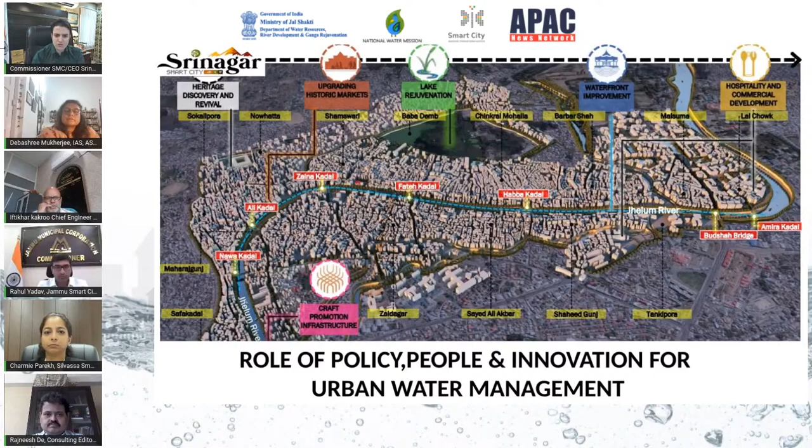So this is the Jhelum Basin. This is the Jhelum River, which meanders through the city, and these are the kind of interventions we have actually tried to identify, some of the major water bodies which are getting linked with the river. This portion, which is very prominent, passes through the central business district from Lal Chowk to Batmaloo to other places, and then goes towards the old city. So this is the topography that we were already talking about.

Now these are the projects we were talking about. One is the Jhelum riverfront development, in which we are trying to, number one, beautify the river on both sides. We have taken it in two stretches, covering almost most of the city. Some portion is greenfield, the rest is brownfield.

We are creating spaces for people where they can come, sit together, and socialize. Some places where they can shop, sit, walk, or cycle. Similarly, all across the river we have around 45 traditional ghats. We're trying to revive those river ghats, and also trying to use some of these ghats for water transportation purposes. Then we have lake conservation.

We have taken two important lakes: Gilsar and Khushalsar. Basically, the water from Dal Lake goes to one more lake called Nigeen. Nigeen is still well conserved. From Nigeen, it goes through a channel called Nala Amir Khan, then to Gilsar and Khushalsar. Both these lakes were almost dead, full of muck and silt. So in order to ensure the circulation system of the water is revived, we have taken up restoration of both lakes.

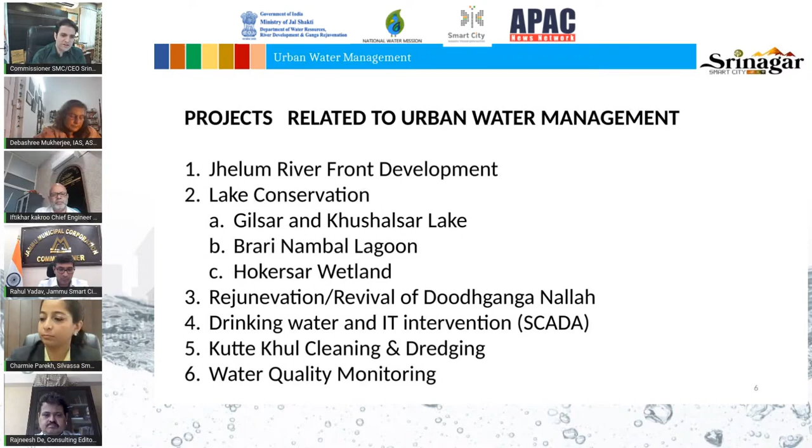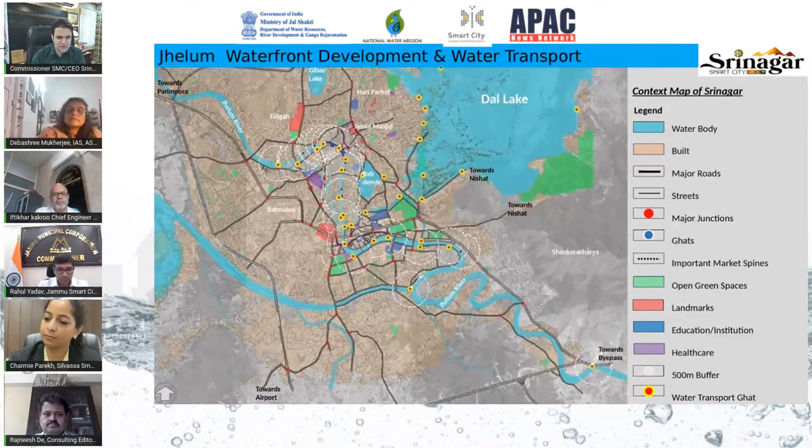I'll quickly go through the slides. These are some pictures of the riverfront development that is going on. Some of this work is already complete, but the remaining is going on. This is what we are envisaging on the riverfront: access improvement, public amenities, ghat improvement, and improvement of the houseboats lying nearby.

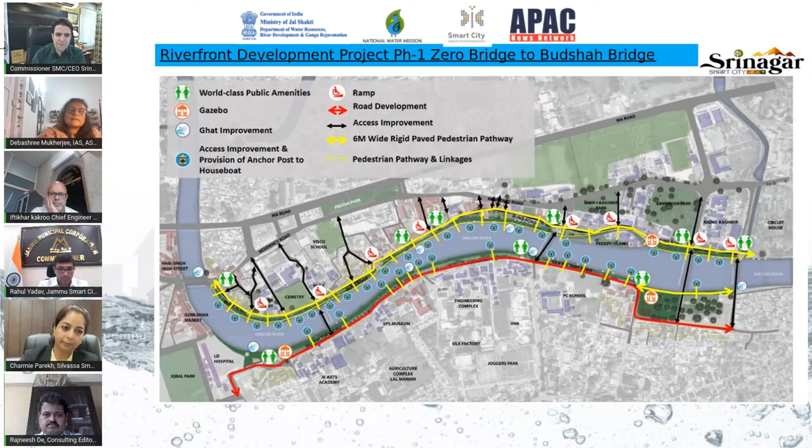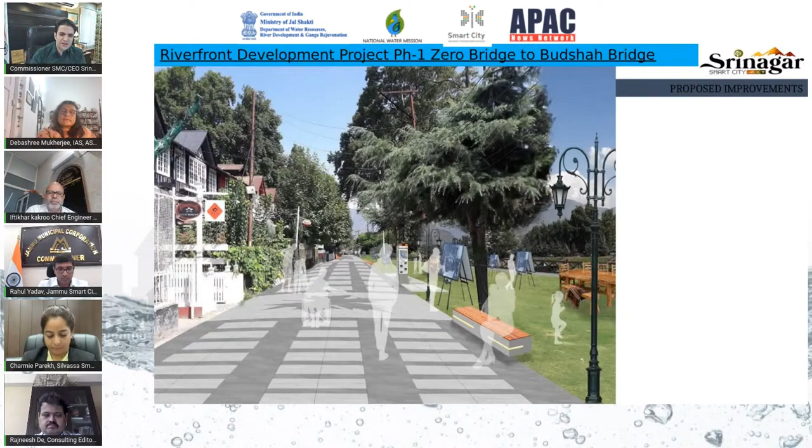These are the approaches towards the riverfront from Residency Road and other sides. This is how we want the riverfront to look like: a nice, good pathway for people to walk, and the space around it, which is very open and accessible. We have dismantled a lot of walls on this. Right now, the dismantling has happened, and we're trying to restore it in this way.

Then water transport. As I was talking about, the city is facing one of the major challenges in terms of congestion and traffic jams. But both Jhelum and Dal Lake give us the opportunity to run water transport, just like it is run in, say, Netherlands, Amsterdam, or London. That's what we are working on.

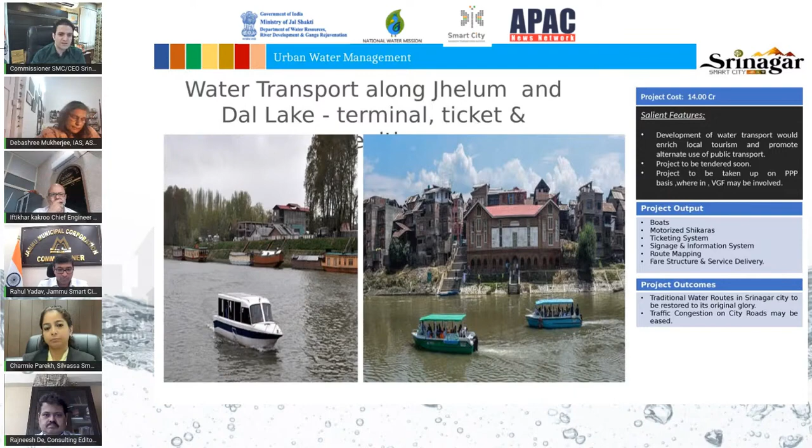One is a Jhelum cruise for tourism purposes. Another is the water transport, for which we are working on a PPP model for 10 years, in which we'll be having electric-powered cruise ships taking people from one part of the city to others as a full-fledged system of water transportation.

Lake restoration. This is the Gilsar Lake that I was talking to you about. The lake ecosystem here is such that water from Dal Lake goes into Nigin Lake, and from Nigin Lake it goes into Gilsar Lake.

This is how this lake was just 6 months back, the picture on the left side. We have lifted all this muck and garbage and silt and weeds out of this lake, and this is how it is looking right now.

Again, the challenge is that it has to be done repeatedly because the siltation is happening. There is still heavy nutrient load in the water which is getting into these lakes. So we're trying to figure out how do we sustain it, how do we stay ahead with the rate of sedimentation. This is another lake that we're talking about, Khushalsar Lake.

This is how it was before the restoration and now how it is. In the past few months, we've also seen in the winter some of the migratory birds coming back into these two places. So what we have essentially done is, number one, removed all the silt and muck from these lakes.

Then there were a number of springs at different places in these lakes, which are a major source of fresh water in addition to the regular flow. The restoration of those springs, and also channel development around the periphery, so that the water movement and circulation keeps going. This is another lake that we have now taken up for rejuvenation.

It is in the middle of the old city. We call this old city Shahri Khas. This is the old city of Srinagar city. In the middle of the city, we have this lagoon. It's called Brari Nambal.

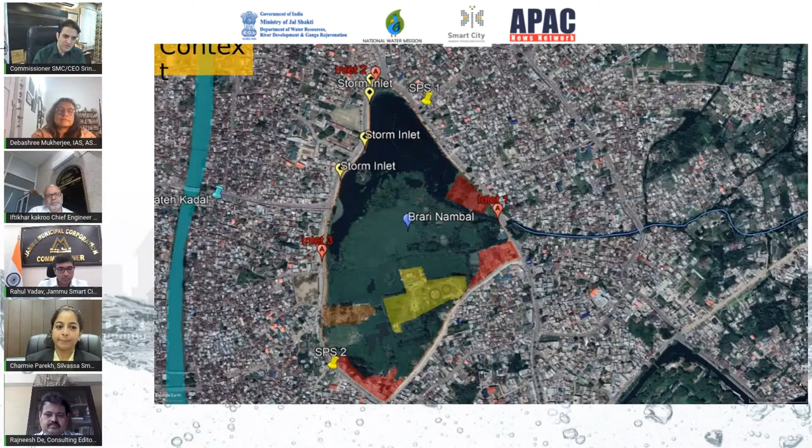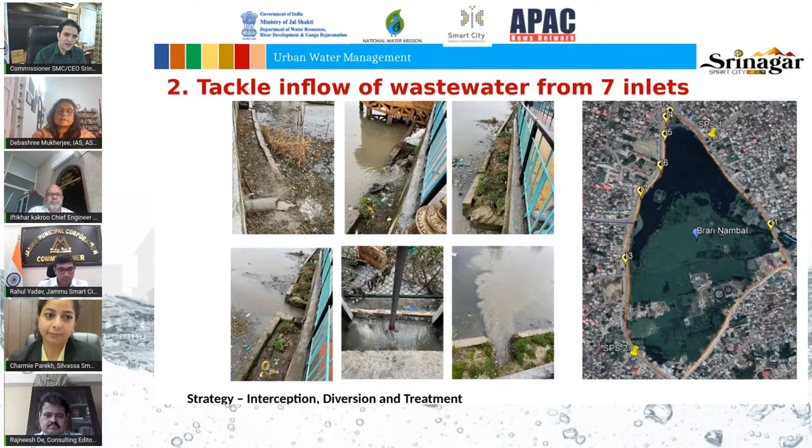Again, along with that, these are the 7 inlets that we are trying to work on. Desilting, deweeding, these are some of the inlets as of now and how we are trying to work on them. These are 7 major inlets from which water goes. We're trying to trap this water, connect it to the sewerage system, and then whatever is the major source of water comes only after it is treated.

These are some of the pictures from this place. This is some of the treatment system, very standard. Here, what we are also trying to do, along with the mechanical and STP based treatment of the water, is look at creating sedimentation ponds and bioremediation as an additional source of treatment of this water. So that's the work that we have started.

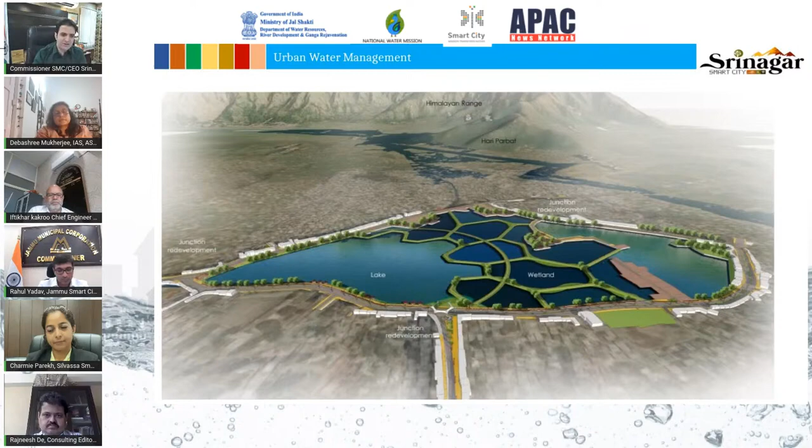We had actually tendered this project already out. Because of certain reasons we have to re-tender and redo it, so it is at that stage right now.

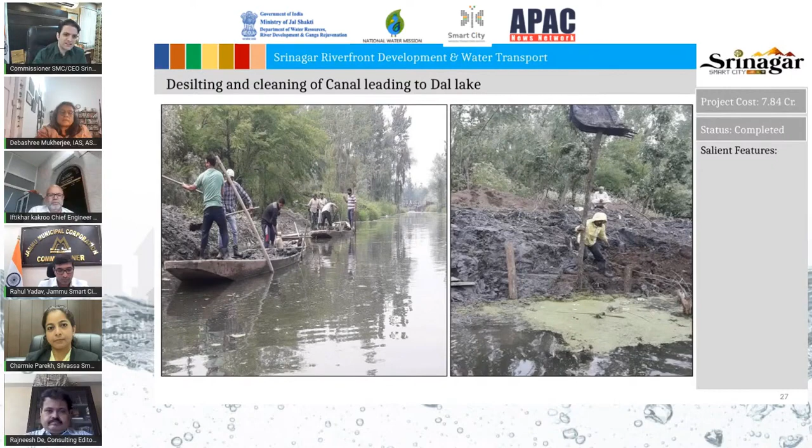These are some of the channels which go into the lake. Through both municipal corporation as well as the smart city, we are opening these channels up again, removing the silt, so that the circulation system gets restored.

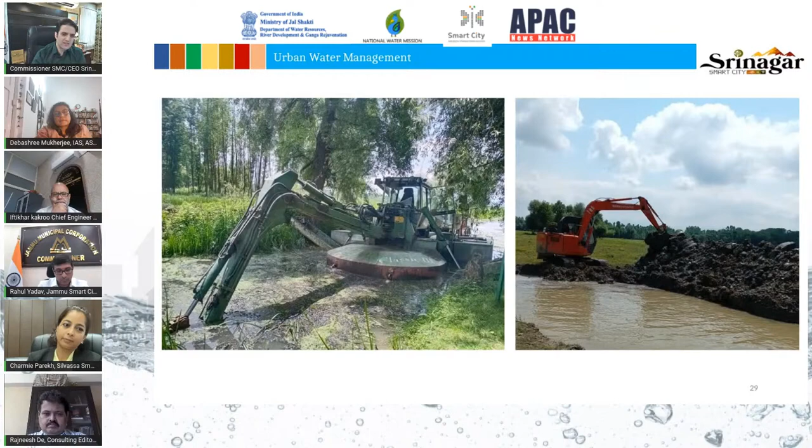This is Hokersar wetland, a very famous one. In 2005, it was included as one of the Ramsar sites. It has around 46 important species of migratory flying birds, and another 60 odd wetland species of birds. Here also, in this restoration work, we are creating certain channels through this wetland so that the water systems are again restored.

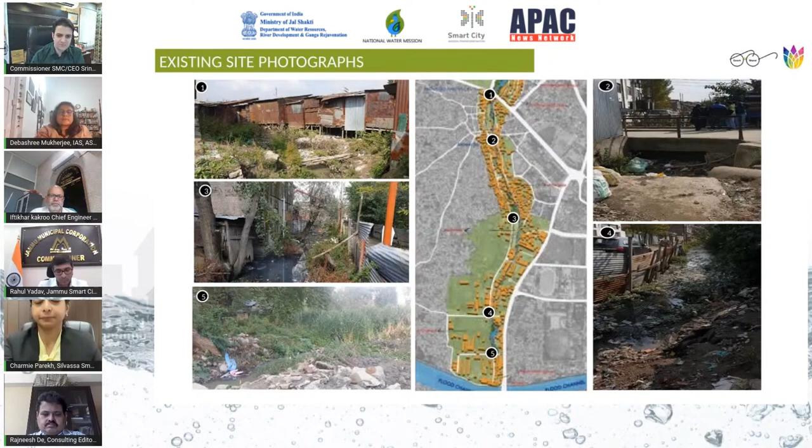This is another channel, the Dudhganga Nala, which I was talking about. It used to be the major flood channel in the city, connecting the southern part of the city and draining this water into the river Jhelum. It is completely encroached now. This is the situation of this stream right now, and it has just gotten converted into, so as to say, a sewerage stream.

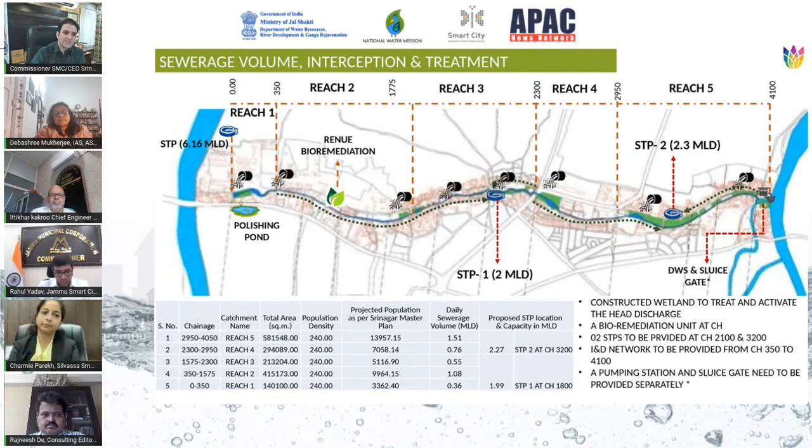So we have worked out a system of how to start bioremediation, how to create polishing ponds, STPs and other sluice gates throughout the structure. Once this is complete, it's going to be a dual two-way win for us. One, whenever there are rains, this is going to be a major channel for taking water out from the city. And in normal days, it will help ensure that whatever grey water is coming in gets treated, and only after treatment it goes out.

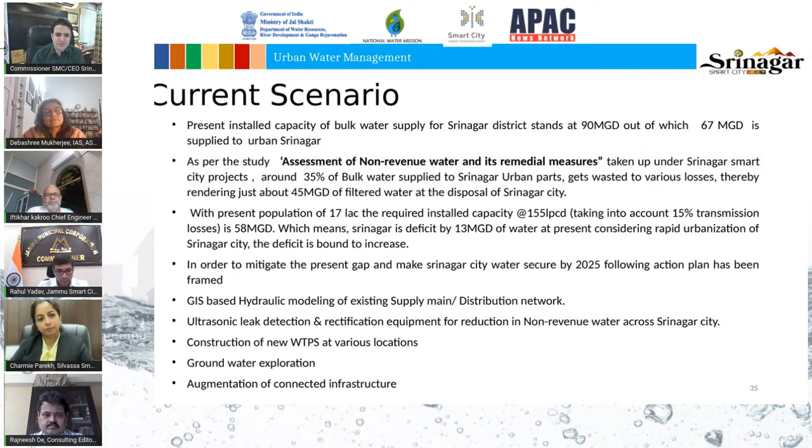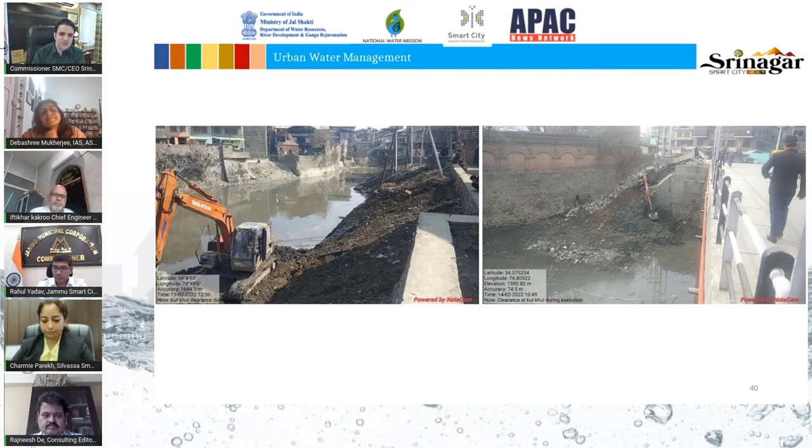This is another channel called Kutkol. There are actually 4 of these kols, kol meaning stream in Kashmir. So apart from the Jhelum and Dal system, these are 4 different channels which connect these water bodies. One is Nale Amir Khan, we already started working on this. This is another called Kutkol, the Kut stream, and we are also restoring this stream back.

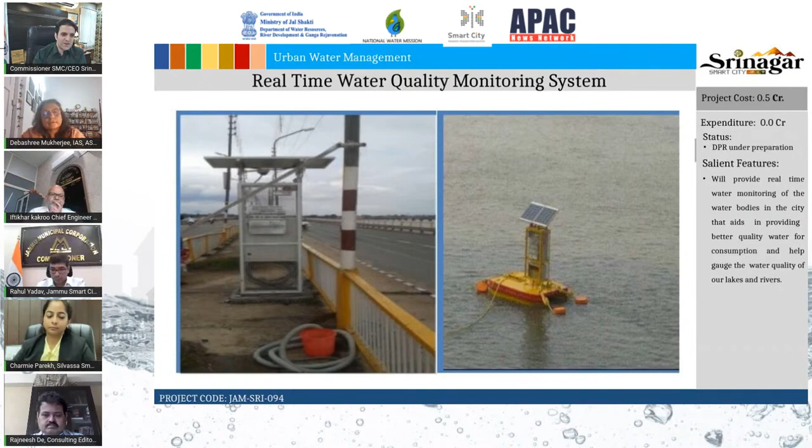This is the final slide. We are also installing a real-time water quality monitoring system in the city, which will monitor the quality of water both in River Jhelum as well as in the Dal Lake and some other major water bodies. The idea is to measure and understand what the quality is, because as they say, what gets measured gets done. That's the principle we are trying to work with.

This stormwater drainage, as I was talking about, because the city traditionally had seen floods recurringly, 2014 being one such occurrence. So in stormwater drainage, we have done macro drainage basin management in the city. The city has been converted into 9 watersheds and 53 macro drainage basins, and we have 84 dewatering stations located, connected to the drainage network in the area. There are submersible pumps inside the sumps, water from the drains gets delivered into those sumps, then there are filter chambers and sluice chambers, and from there this water gets pumped out through an outfall into the major water channel, either a flood channel or the Jhelum River, whichever is nearby.

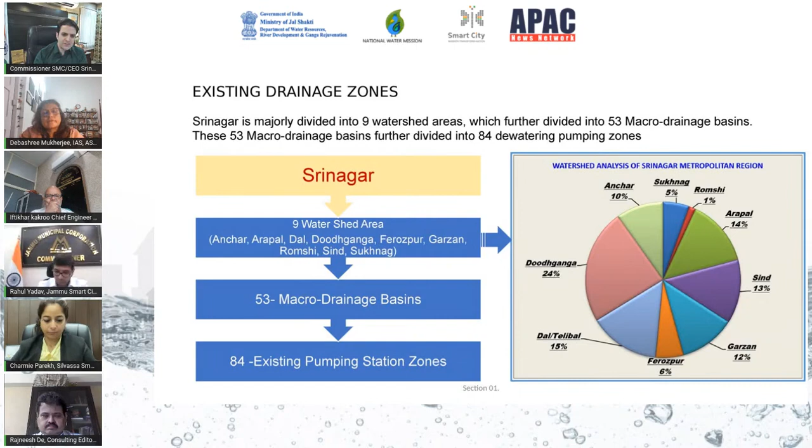This is the existing challenge. Many times this is what happens whenever there's a small rain or post snow, when the snow starts to melt. So with this, we have increased the capacity of these 84 dewatering stations by at least 10 times till now. All state-of-the-art modern equipment has been installed. All power backup systems, control systems, and where people sit to control, have been placed above the highest flood level, and redone. Besides that, under JTFRP, Amrut, and several other programs, we have also upgraded our drainage network system. Yet challenges remain.

Before I conclude, one of the challenges is water quality. We are improvising on the circulation, but how do we get the BOD levels and other parameters down to the permissible ones, both in the rivers and in the lakes? That's one of the challenges.

Another challenge is that the city does not have a separate drainage and sewerage network, so everything is getting mixed up into the drain. That's one of the major infrastructure challenges we have, and going forward that will be a major priority for the government. We are trying to lay down a master plan or pathway for planned development.

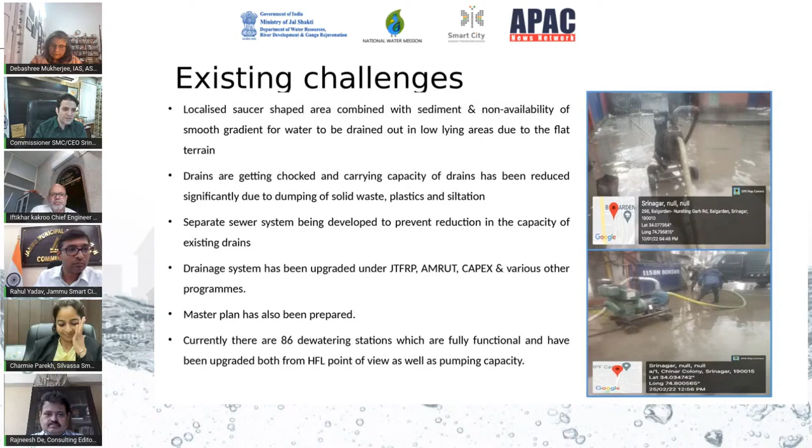Thank you. I think Iftikhar Sahab, if you have something to add. Sir, I think you have covered it all. If I say something, it will be at the cost of repetition.

The only thing I'd like to mention is that ma'am talked about the water energy nexus. In Kashmir, we have a lot of upland water, and I think our focus should be mainly on tapping the upland water rather than relying on lift stations and groundwater. We have vast reservoirs of groundwater, mostly untapped, because we do not find a deficiency in source. There are isolated pockets with deficiency, but these can be overcome if we identify bankable, dependable sources, and through a water conveying system, which is the cheapest version of water conveyance, through pipes, we can feed these areas.

Right now our focus should be on upland water, and since ma'am is also looking at the water mission, the government's focus should be to discourage use of lift stations for water supply schemes and rely more on gravity water or upland water. That's all I want to say, rest I think you have covered it all. Very nicely covered, thank you.

Ma'am, would you like to give your feedback now or at the end? No, I think I will wait. Excellent presentation, Athar, you focused on the challenges and what you're doing. I may have one or two things to say, but I'll wait till the end.

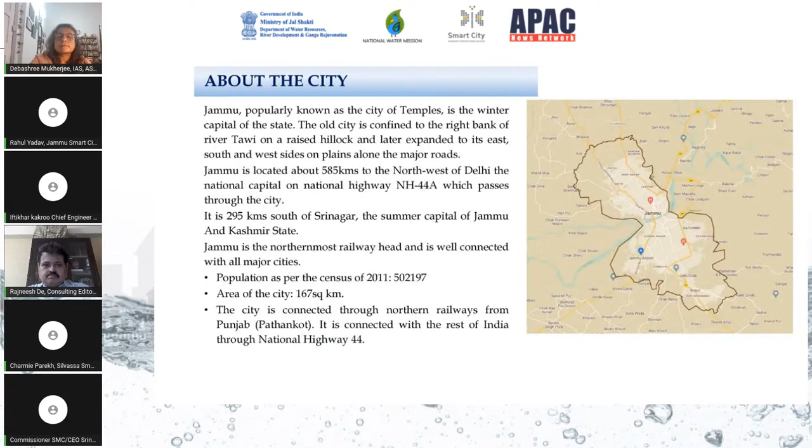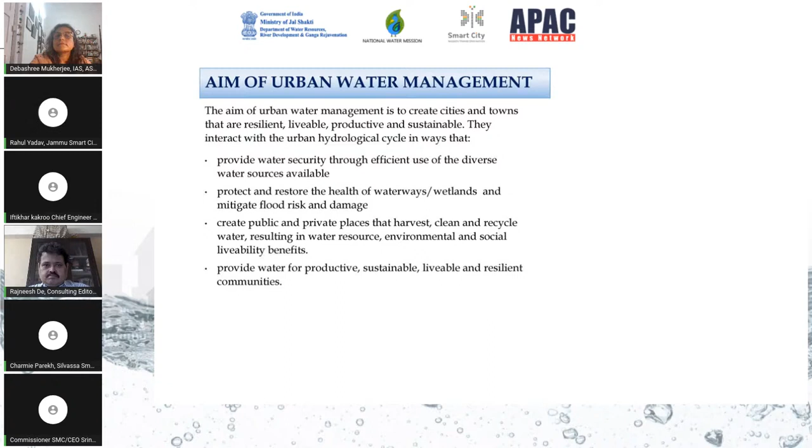We have started one project for rejuvenation of water bodies.

Under this, we have started the process to identify all the water bodies in Jammu Municipal Corporation area and rejuvenate all these water bodies. The broad objective was to rejuvenate the water bodies and improve all the parameters of these traditional water ponds we are having. We did a detailed survey of current biochemical oxygen demand, pH level, COD, and DO.

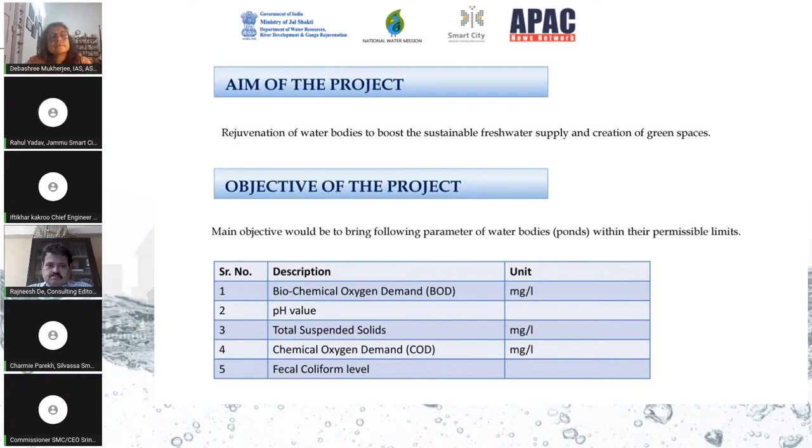We have prepared a detailed plan. We are de-weeding all these water bodies and doing desludging of all these ponds so that we can increase the holding capacity, and we are using traditional clay lining so that water can be retained throughout the year.

Bioremediation is the major part of our project. Most of these water bodies, over the period, have had many nalas flooding into them, decreasing the water quality and basically killing these water bodies. So we are also doing some civil works to tap all those nalas, installing screen chambers wherever necessary, and diverting many of these nalas which were falling into these water bodies.

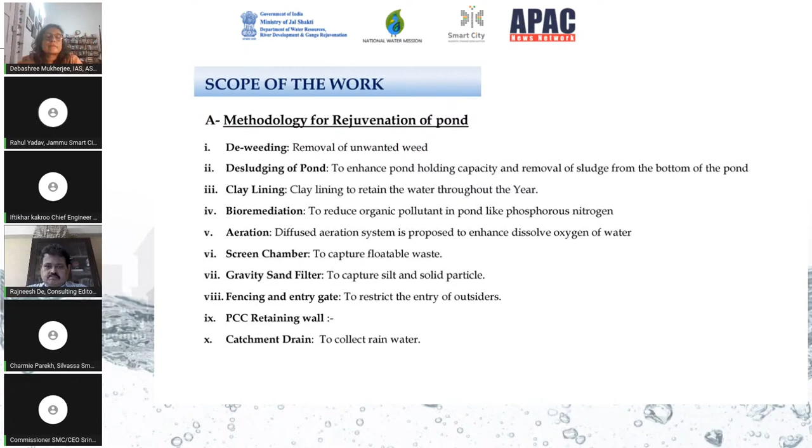Other than that, we are also constructing some civil amenities along these water bodies to give it an aesthetic look.

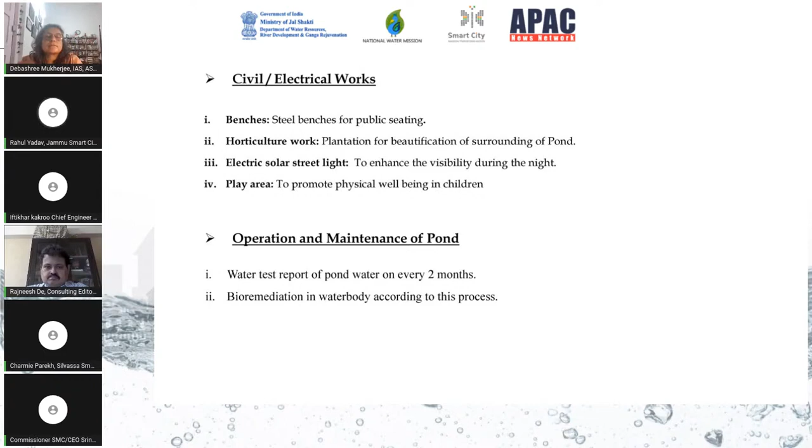Our project also involves O&M of these water bodies for the next 3 years. The same person will also be doing the O&M. Water quality will be monitored every 2 months, and based on that, we will be doing further remediation if anything is required.

Under this project, we have identified 61 water bodies in Jammu, with a total area of 368 kanal. The current total volume of these water bodies is 3,39,600, and it will be increased to 4,25,000. So there will be a sufficient increase in the water capacity of these water bodies.

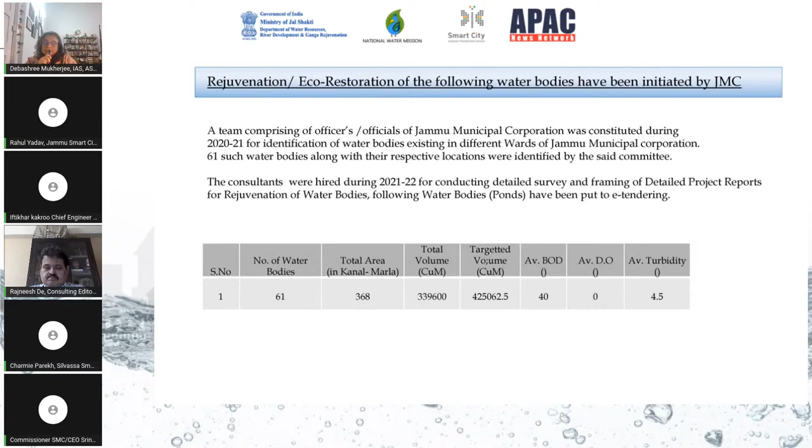The current BOD demand is quite high, and the available dissolved oxygen is almost nil in all these water bodies. We will be increasing those and improving the water on these parameters.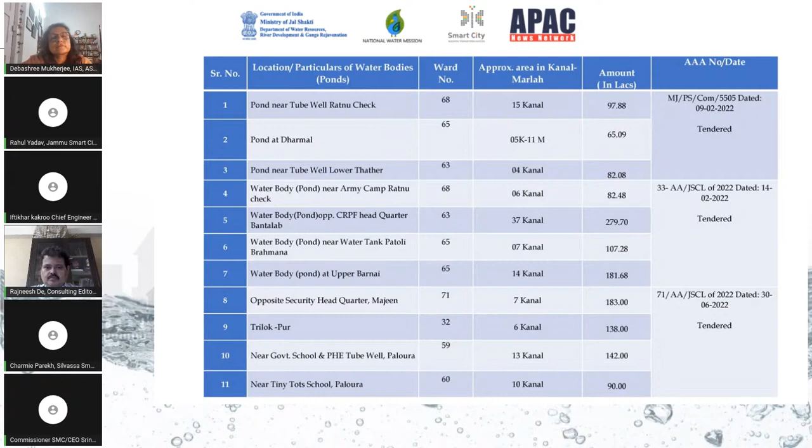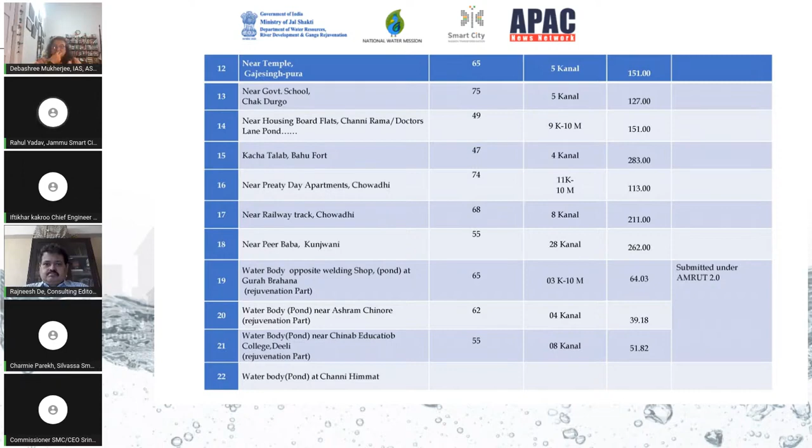In the first go, we are taking 22 water bodies. We have identified 62 water bodies, but in the first go we are taking 22. 18 of them we are taking under Smart City, 3 of them under Amrut 2, and 1 under our district capex.

These are the existing water bodies for which we are doing remediation, and as you can see, many of them are actually in very bad shape. They are mostly enclosed with high weed growth, and the water quality is very bad. There is hardly any biological life, meaning there are hardly any fishes or such kind of biological life available in these ponds these days.

These are more pictures of such ponds. This is one of the ongoing projects where we are doing the restoration work. Bioremediation work will be starting after our monsoon season is over. We have tendered all these works, and all these projects are under execution, but the main part, which is bioremediation, will take place after our monsoon period is over.

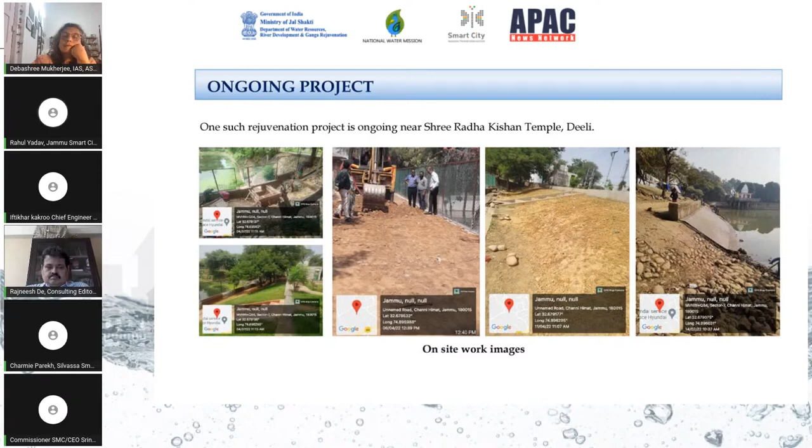We are also doing aeration of all these ponds to increase the dissolved oxygen quantity.

We will also be doing channeling and fencing of all these water bodies so that they remain safe. There is also a special emphasis on water channels, because many of our water bodies, due to unplanned development, have had their catchment areas damaged quite badly, and they are not receiving proper recharge. This is one of the main reasons for their encroachment - over the period they get silted and do not receive proper recharge. So we are also doing the catchment treatment.

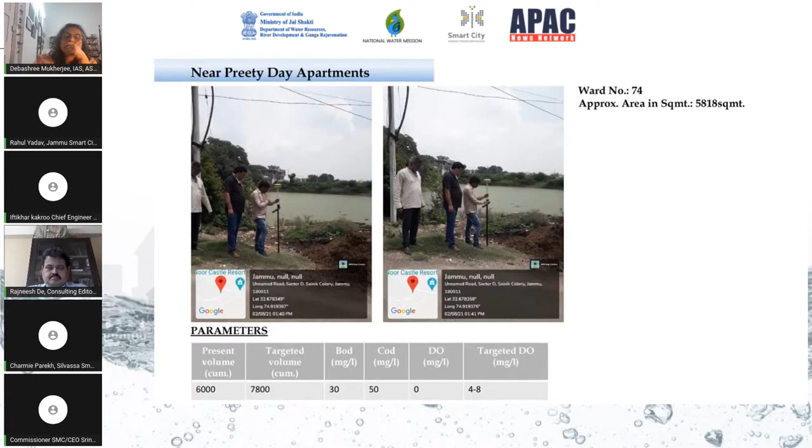These are some more water bodies. For example, for these water bodies, this is our present water volume, and we will be increasing our water volume by almost 30%. The current BOD and COD demand is quite high, and the dissolved oxygen is almost nil. In all the water bodies, the dissolved oxygen is almost nil, and we will be increasing on that.

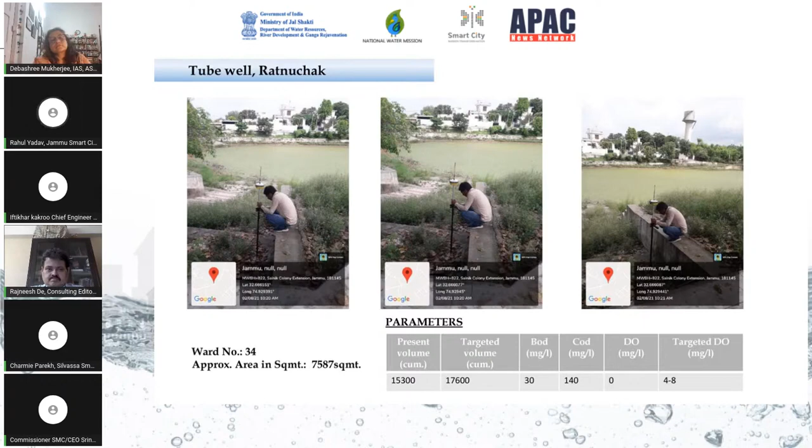As you can see, most of these water bodies have very high algae cover, and they are basically badly infected with phosphorus and nitrogen contents.

Other than that, we are also doing a rainwater harvesting structure for our town hall building. In this project, we will make our town hall building, our municipal corporation office, self-sufficient. We will harvest all the water in our town hall building complex, store it in a tank, and after filtration we will use that very water.

So we will be making our town hall building self-sufficient under this project, and we hope our building will be water surplus, and we won't require any water supply from outside the area. So this is an ambitious project, and we will be doing this.

This is currently being tendered, but it is under execution. So under this, we will be collecting all the rainwater in the tank, and after filtration we will be using it for the supply purpose for our Jammu Municipal Corporation office.

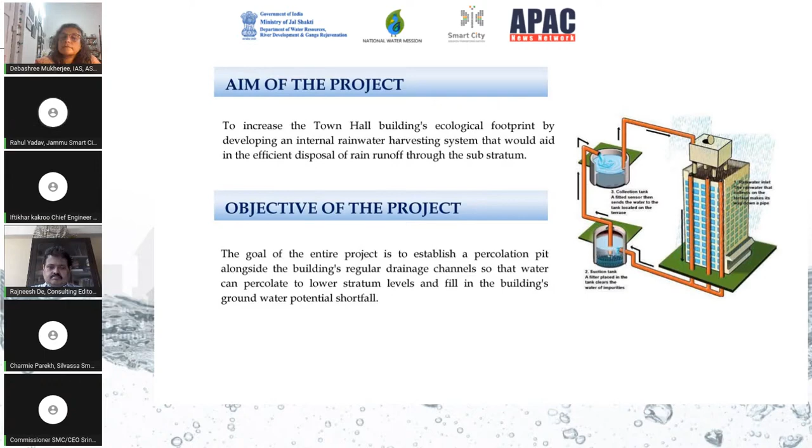So these are some of the projects which we are doing in Jammu Municipal Corporation regarding water conservation. As ma'am has pointed out, blue green infrastructure and urban flood management are the relevant topics these days, and we are doing work on that.

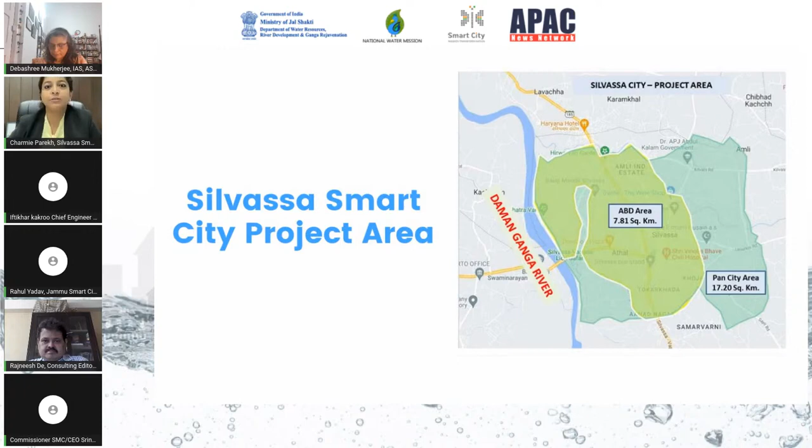This is the Silvassa Smart City project area, where the ABD area is somewhere around 7 square kilometers, and the other area, the SMC area, is also somewhere around 17.20 square kilometers.

The main source of drinking water as well as for other activity is the Damanganga river. This river flows through Maharashtra to Dadra and Nagar Haveli, and later on goes to Daman and then merges into the sea. So it crosses many states and union territories.

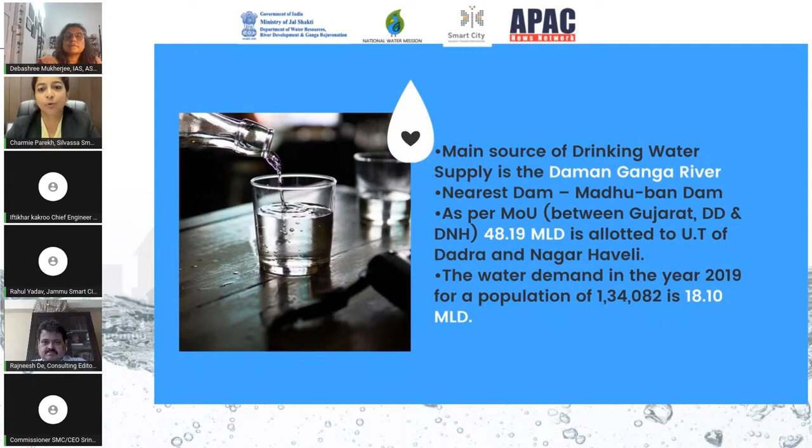There is an MOU with the Damanganga Canal Authority, where 48.19 MLD is allotted to the UT of Dadra and Nagar Haveli. And if we see the demand that was in 2019, which was 18.10 MLD, now if we calculate it, we can see it in the next slide.

The 19.44 MLD is the calculated water demand for Silvassa urban area, and urban population is somewhere around 1,44,000, and the number of households are 38,680. The water supply coverage provided till now by the Silvassa Municipal Council in the urban area is 64.63%, and Silvassa Smart City in its mission has aimed for 100% saturation by 2024.

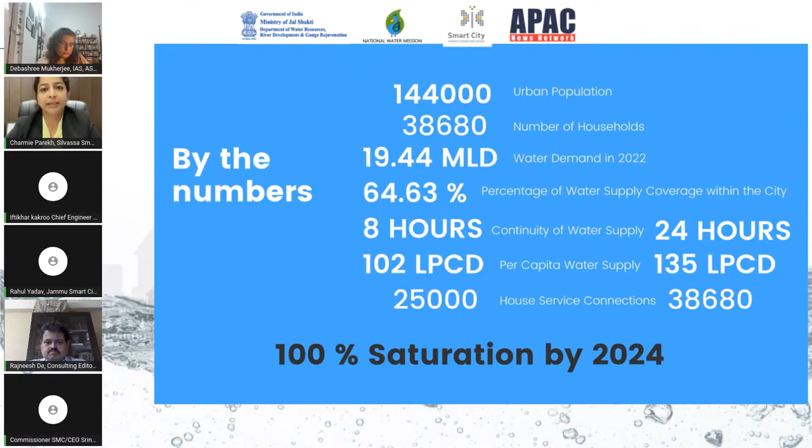Currently, we are supplying water approximately 8 hours to the households, which will definitely be made available for 24 hours by 2024. Currently the supply per capita is 102 LPCD, which will be made to 135 LPCD. And as I said, there is only 64% coverage, so from 25,000 households, we'll be covering the entire population of the urban area, that is 38,680 households.

Talking about various projects related to water supply as well as sewerage under Silvassa Smart City, the first thing is an integrated project of roads, water supply, as well as sewerage management, costing us somewhere around 570 crores.

The work order was provided in December end, and a few components of that project related to water supply and sewerage works are energy audit. First we will do the energy audit of all our pumping stations and entire sewerage network system, to know how much energy is being utilized or wasted in running the entire network. There is a cost in providing water and treating sewerage, so the energy audit would help us in doing so.

The next stage would be the infrastructure assessment of both water supply and sewerage network. We will be joining the water supply and sewerage network with the SCADA system, bringing information and required data to our ICCC center. For water supply, we will install bulk flow meters at various places, and smart metering is also envisaged. Infrastructure assessment for sewerage and SCADA is also envisaged.

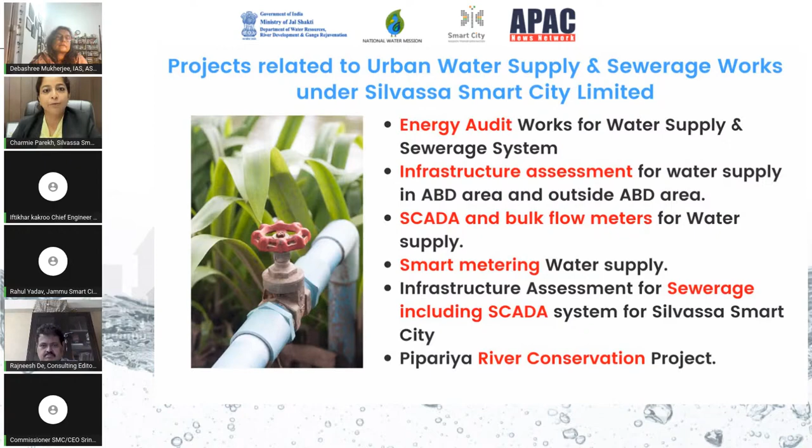Apart from that, if we talk about blue to green linkages, we have a river - a tributary of Damanganga River called Pipariya. So we have also planned the Pipariya River Conservation Project.

Talking about energy audit, we know it is an assessment and analysis of the flow of energy into the entire system. We want to assess where we are going wrong and where we can improve, how we can have data collected, and use that in making our networks better. This is the first and foremost condition, and we are going to start with it pretty soon. Our project also envisages having the energy audit at the end of the project, around 2024, and then for 3 years also.

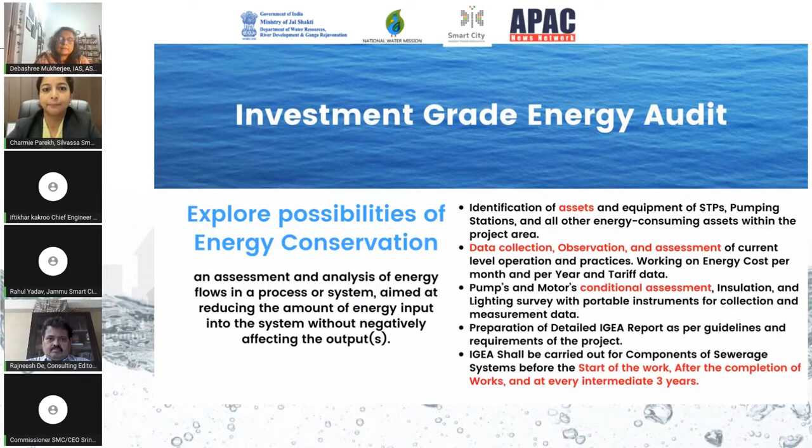Talking about 24/7 water supply that has been envisaged in this project. As I said, we will be augmenting our water supply.

We are not looking for installation of any new schemes, but we will be putting in more pumping stations and pumps at various places. We will be augmenting our capacity by doing technical changes, like getting our hydraulic model. After assessment of the entire infrastructure, we will rehabilitate it also. By installing meters and having district metering areas, we will look at pressure management and leakage management system through our energy audits.

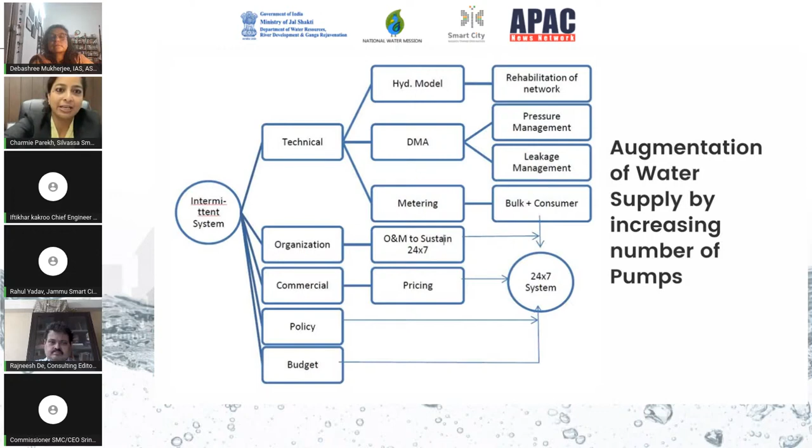Because meters are going to be installed, it will have an impact on people's behavior. Earlier, the Silvassa Municipal Council had a flat rate for drinking water and other usage. As we install quantity-based meters, we will know how much we are utilizing water, which will encourage citizens and consumers to save more water. Since we have a SCADA system, we will have good technological support and data assessment to divert water at what point of time, depending on usage and demands. For that, we will require policy intervention as well as budgetary and commercial interventions.

Looking at the infrastructure assessment of water supply in the ABD area of Silvassa Municipal Council, we currently have one 4 MLD plant which is going to be demolished under this project. But one 11 MLD plant is under testing phase, and this will help us provide water supply 24/7 to the ABD area as well as the rest of the households which were not earlier covered. Water will also be provided to the periphery of the ABD area through this project.

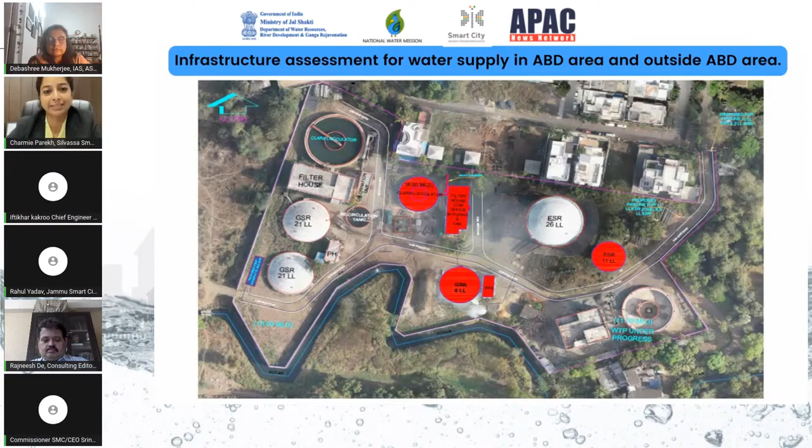All of us know how SCADA and bulk flow meter works, but other processes of our project would include dismantling of the 4 MLD plant and augmentation of water supply, connecting the entire water network with the SCADA system. Apart from that, wherever we require, we will also install lifting cranes for pumps for the 15 MLD plant.

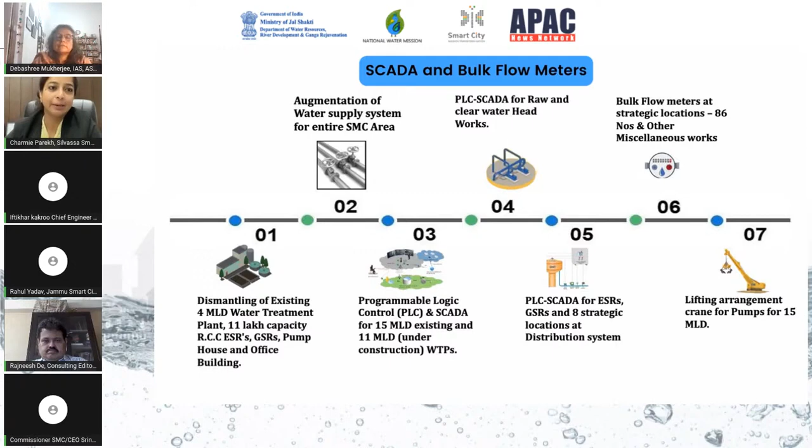I'm sure everybody knows how the water meters work. As I said, ours is a quantity-based water meter, so we will be getting data from each and every meter on the usage of water at each and every household, and that will be an entirely automated system.

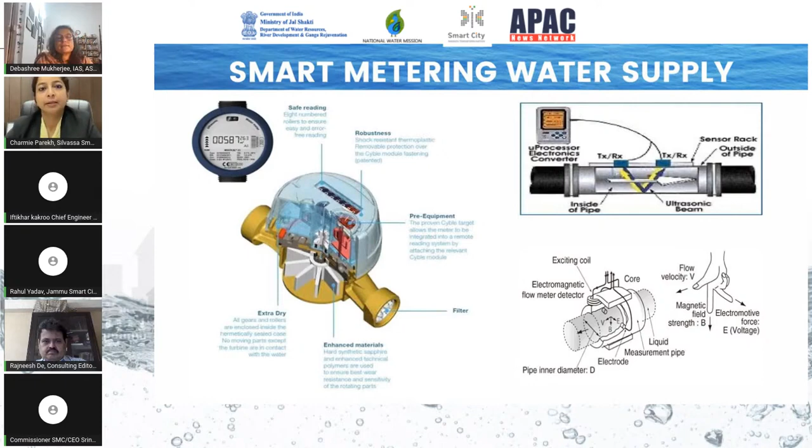Talking about the sewerage network, we already have a 13 MLD sewerage treatment plant installed, but the current capacity at which it is running is only 3 MLD. So under the integrated project of road, sewerage and water supply, we have envisaged that we will be providing 100% saturation by 2024. The pipeline network has almost been laid at every point of Silvassa Municipal Council.

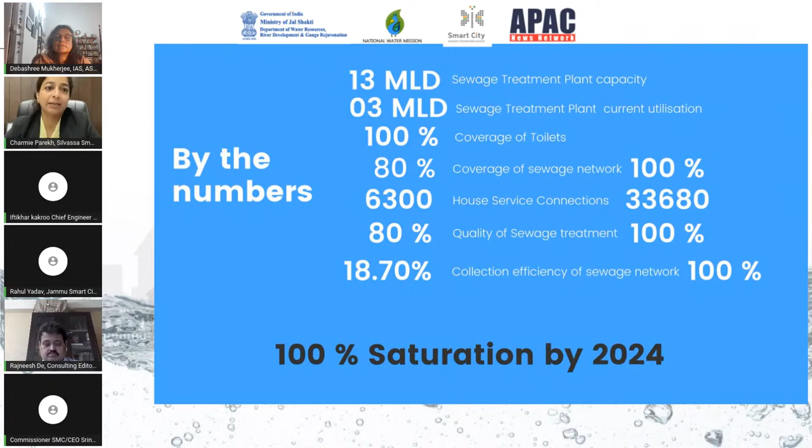However, the house-to-house connections remain. That's why the efficiency of collection is around 18.70% right now, which we want to take to 100%, and the quality should also improve as we reach our target of 33,680 households, which are currently standing at 6,300.

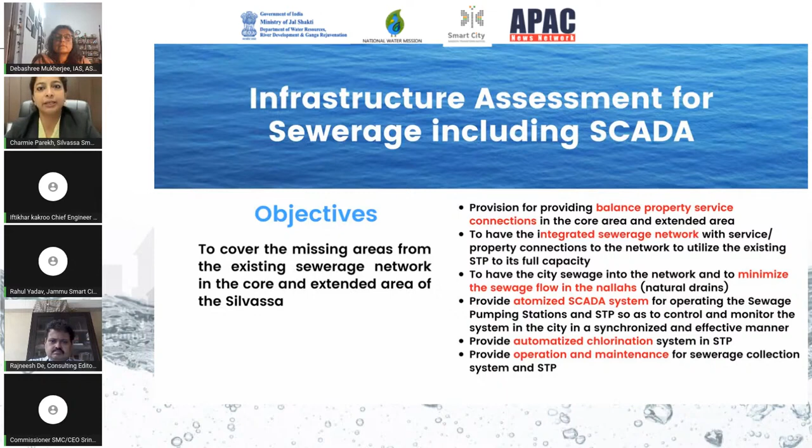Talking about infrastructure assessment and joining it with SCADA, we will be covering the entire area of Silvassa Municipal Council which is missing from the network currently, and we'll be joining it with the SCADA system.

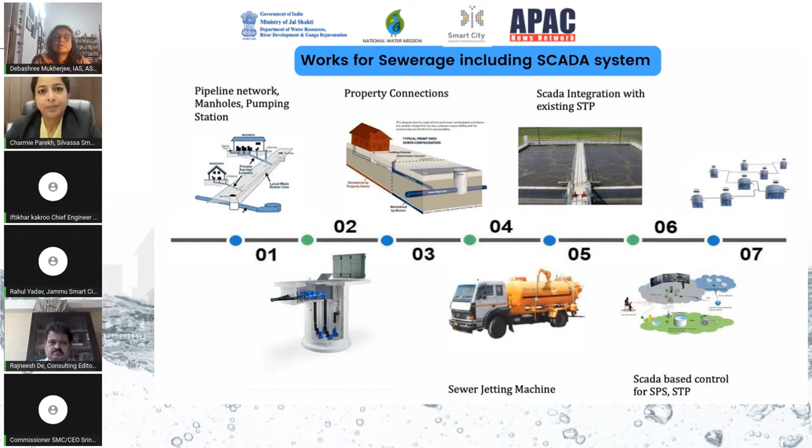The SCADA system also envisages automated chlorination of the system, so there is less manual intervention there. These are the workings of the SCADA system.

Talking about the blue to green linkages, as I mentioned earlier, there is a tributary of Damanganga River called Pipariya, and we have included in our plan a Pipariya River Conservation Project. We will be floating the tender very soon, in a couple of days, and we are looking at bringing in an agency which will work for us. The cost is somewhere around 10.5 crores for the entire project.

As others have already talked about conservation projects, I'd like to run through the process identified by NEERI, where the water gets in, then there are screens, then a sedimentation tank, then an aeration tank so that the bad smell goes away, and then there would be bio rafts for the bioremediation process.

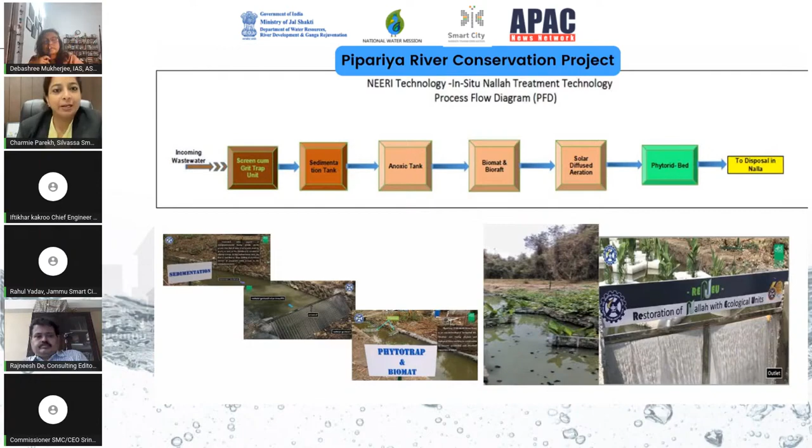The Pipariya River I'm talking about is 6.6 kilometers long. As I said, the Damanganga River and its tributaries come from Maharashtra, then Gujarat, and then touch the Union Territory of Dadra and Nagar Haveli and Silvassa town.

Towards the top left, the blue line is the Pipariya River, and towards the top left there is an industrial area, entirely an industrial zone, and this is where most contamination happens. This is where we are envisaging our bioremediation plant would come, and we are in the process of coming up with a policy where we treat this water and then give it to industries for their industrial purposes.

There are also takers for this treated water.

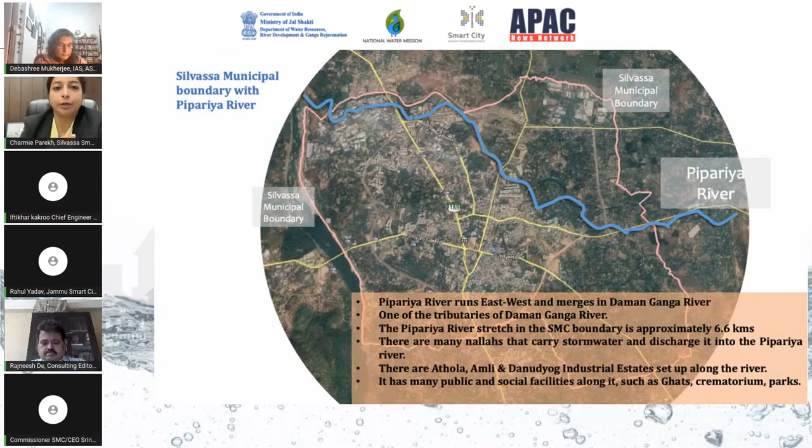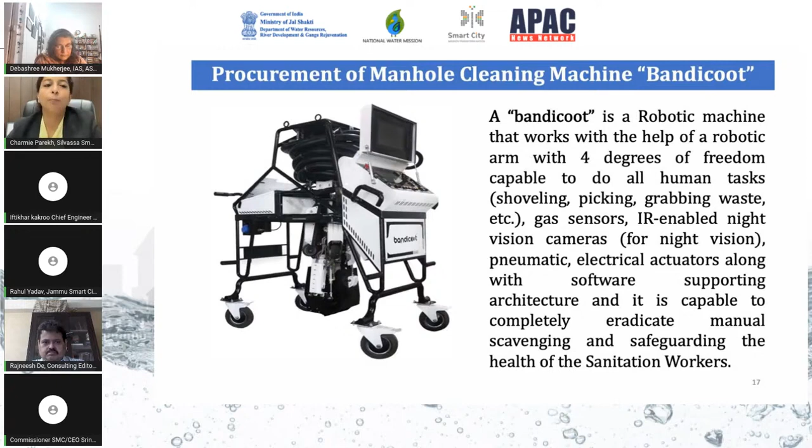Apart from that, Silvassa Smart City has been working on removing manual scavenging entirely from the municipal area. We have procured a robotic manhole cleaning machine, and somewhere around 350 manholes will be cleaned using this Bandicoot machine. It is entirely operated by a robot, with one screen, and a person outside on the ground can operate it, and it does a wonderful job.

Apart from that, as was also talked about, making the invisible things visible, there is this huge ESR in the middle of the city, so we did a placemaking project under our smart city mission.

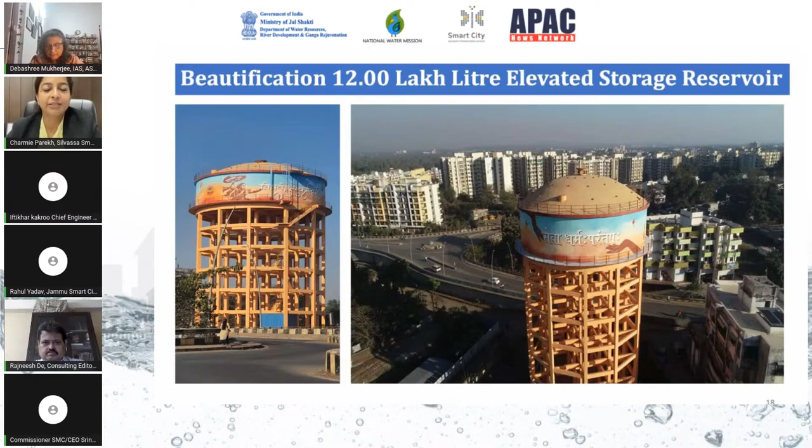Apart from this, we engage in plantation activity on almost every occasion, especially at our sewage treatment plants, through our river beds, and our WTPs as well. The smart city team keeps engaging with citizens in making the city more green.

And one more initiative that we have taken along with revenue department, because as we talked how urban flooding happens because of heavy rains. So places like Mumbai, Silvassa, Vapi, Valsad, Surat, each and every city has seen almost flooding or flood-like situations in the last couple of weeks, especially last week.

So what we are doing is we have mapped all our streams, all our ponds, and all our water bodies through GIS, and we have done a massive encroachment removal drive just before the monsoon, and desilting of some nalas as well as the streams coming downstream. I would not say waterlogging problems did not happen in the urban area, but it has definitely brought the number down. So we will continue to do so after the season allows.

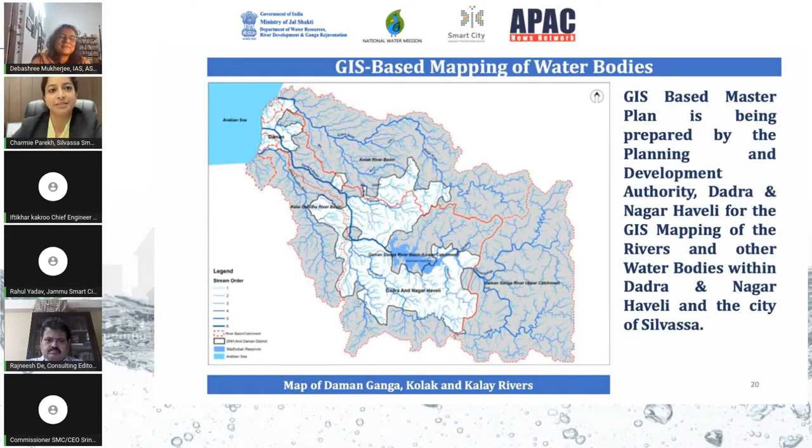So with that, I would like to conclude my presentation here. Thank you so much for this opportunity.